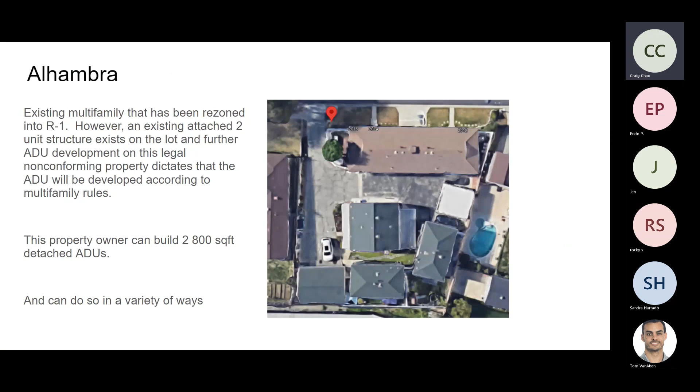Clear? All right, so I want to talk about El Monte and how they got screwed and what we can learn from them. Earlier from this link, the first one, this is an example - if you guys want to take the chance to peruse it yourself - of how the state government puts the Johnny B. Goode stick on the local city. In that link, you'll see the state basically making an example of El Monte to ward off other cities from doing the same. So everything El Monte got a correction on, you can basically understand is your by-right condition in any city you're building an ADU on.

Does that make sense, everyone? Don't be shy, say something. Yeah, okay, you can hear you guys even though this mic's good.

So, okay, the architectural style to match requirement is basically more or less killed, right? The requirement that an ADU must look like a single family dwelling, whether or not it is built with a single family dwelling as the primary dwelling on a lot, and that it be integrated into the design of the primary dwelling, are subjective and therefore violate state statute. Therefore the city should remove this phrase from the section.

Now this goes back to June of 2022. So during the days I was doing other ADUs before then, cities had been fighting the architectural style to match forever. Some cities like LADBS, LA, Los Angeles City, were very progressive, but once you started going out to suburbias, like Arcadia, Pasadena, they were very NIMBY and trying to block everything they can about ADU. But now that's been opened as of the last 10 months.

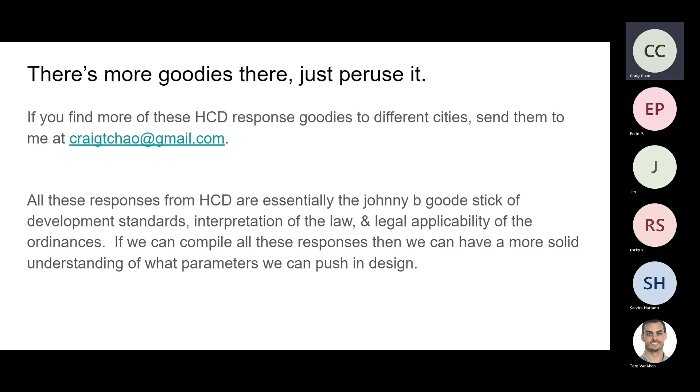If you find any HCD responses to projects you're trying to work on, I would love if you could send that over to me, because all of these become a compilation of information, a database that sets the standard that's not totally public information. So if we know HCD is the Johnny B. Goode stick of development standards, interpretation of the law, legal applicability of the ordinances, then we can compile all of that and push the parameters of design.

So let's talk about some projects we have done. This is not a flip, this is a development that Felix did for a client, I did not draw this one. It's in the city of, I think, Westchester. We have an existing corner lot duplex, detached garage, and the existing was detached, so we didn't have to fight any uphill battles there.

And the existing utility situation was—am I getting too advanced with the utility right now, Tom? Stop me if I am. No man, no, you're good, you're good. Okay, hey guys, if you have any questions, feel free to. I can slow down. Just, no, follow. You're good. Yeah, all right, so keep going. Yeah, if you guys have any questions, feel free to just raise your hand. Yeah, yeah.

So I have a relative who has a single family dwelling in Santa Ana, and they tried to get an ADU contractor to build an ADU in the back lot. But when they went through the city contacts, they said that's the Midtown specific plan, so they didn't proceed with the construction.

What year was this? This was last year. Oh, are you asking when it was zoned? No, last year they went down to the city and asked them. Yeah, 2022, they came to that ruling. But the zoning was done back in the 90s, like they already had a plan.

The city already had a plan. This is up by kind of upper Santa Ana by the Bowers Museum, or a little more correct, situated. Like the stretch where their dwelling is, it's a row of single family homes, like the old ones. But apparently the city has zoned that Midtown specific.

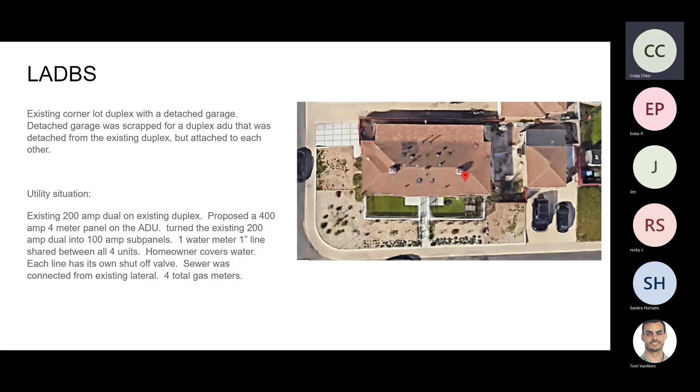And then we propose 4 gas meters, so tenants pay their own gas, all separate bills. Here's a little plan of what that looked like - basically just a demolition of the garage and pushing 5 feet setback from this duplex ADU, which is one conglomerate structure demised in half with a firewall. That entire thing is 5 feet away from the existing house, 4 feet from the rear, and another 5 feet from the side setback, which also happened to be a public utility easement. Make sense?

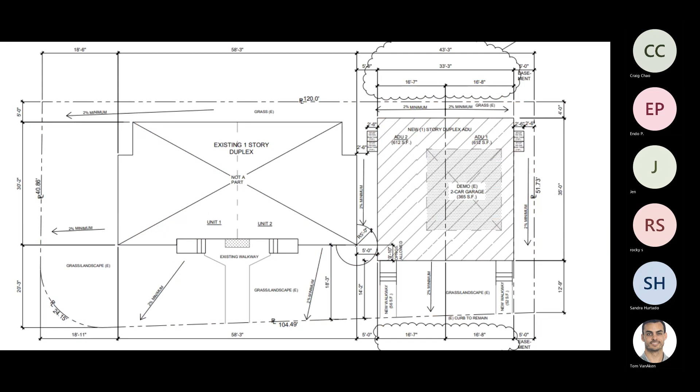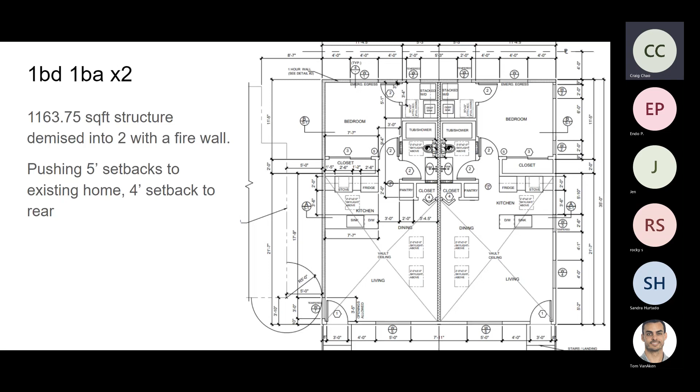Moving on - so this was a 1 bed, 1 bath. Here's a little layout of that, basically just mirrored units, with the entry as far away from each other as possible. One and done.

So here's another one that the same client did, also in Westchester I believe. They scrapped the garage and did the same concept in the back. The utility situation was basically the exact same.

So the strategy usually is there's always going to be some kind of power pole, usually in the back. And whenever you're introducing this ADU, the location of the buildable ADU is usually always between the power pole and the home. And because you need sub panels on the ADU anyway, or electric panels in general, you can opt for those to be mains so that you don't have a giant wire hanging across your entire property and over the roof of the ADU you're proposing.

You're basically going to make that wire drop the shortest possible, which if you go to Tom's house next month, May 13, you'll see that electrical situation. We're basically making the drop shorter and then running underground all the electrical we need to feed the existing house, and turn their old panel into a sub panel, ideally in the same spot. So Craig, correct me if I'm wrong.

If you upgraded the main panel—I'm calling the existing house that is now the sub panel—with arc fault breakers, you would have to wire the whole house to get that third wire ground, correct? I believe so.

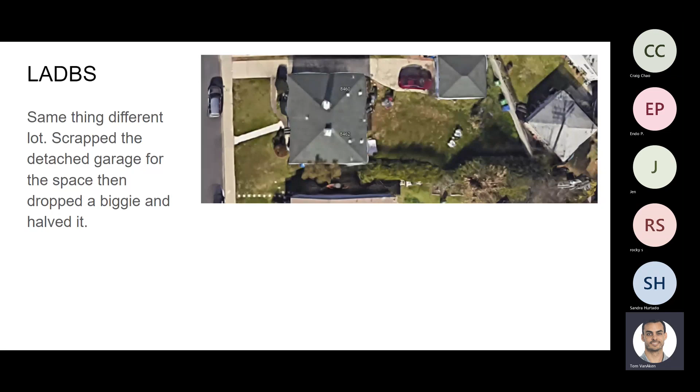So this is what this one looks like—not the perfect mirrored unit, but it works. The utility situation was just like the previous one, exact same. Is it easy to see over there? Yeah, we definitely got it. This one's nice, vaulted ceilings and all that.

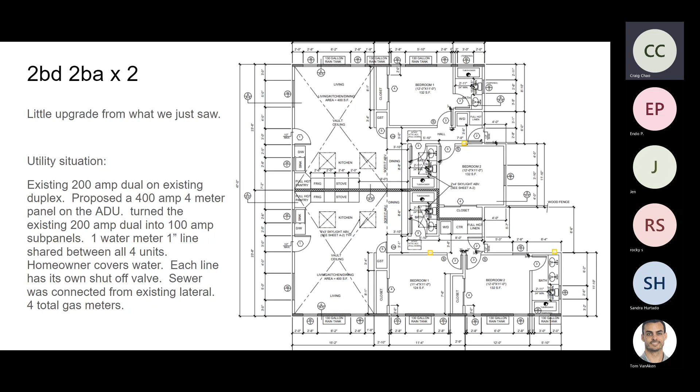I actually made this presentation a little too late, or maybe too early—what am I trying to say—because I didn't actually know that our client sold this project.

So we took this R3 lot and proposed this triplex. There's a current house on it, 6622 Pine—look it up, nosy up there on Google Maps, there's a broke down house over there. We got this proposal approved by fire and were going to go in with planning, but the property got sold. I do want to talk about this project anyway, because the new property owner hit Felix and I up asking for a price to take it to the finish line, and we're still under negotiation for that.

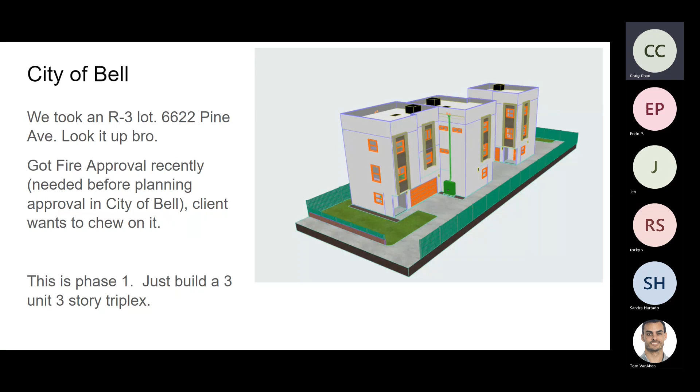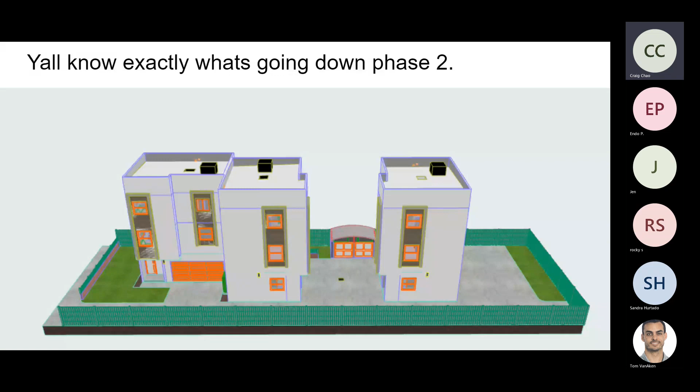So this is phase one of the project: build a 3-unit, 3-story triplex, everyone gets their 2-car parking. This is a small lot, 50 by 140, an R3 zone lot. Got your open space, trash enclosure, and required guest parking out in the back.

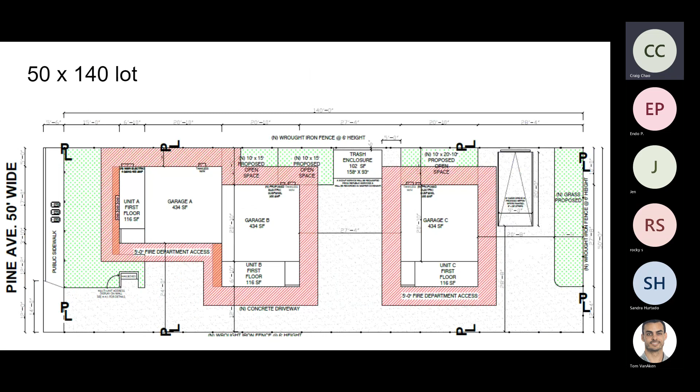Basically we're just trying to build the most effective physical manifestation of our next step. We're going to build this 5-unit property by doing the detached ADU, duplex ADU status. We're going to override the guest parking you see in the back and do something like that. So the actual ADU schematic was still to be determined. How it's basically going to go down is we do the triplex first, then come back with approval. While that's being built, we can get the plans approved for the ADU, and once that's final, you can basically get your job card for the ADU.

This one's on a tighter timeline if the investor wants to guarantee his grandfather of the non-owner occupancy clause. So Tom, do we all know about that? Do you want to refresh on that? Should I touch upon that, or is that...

Yeah, go ahead. I don't know if you guys know there's kind of a political thing going on—if you're for Gavin Newsom, power to you, some of us are not, but we actually think we kind of need him to get this grandfather clause extended. What it is, is this changes the ADU game from being something that investor sharks like Tom can do versus your everyday mom and pop.

And what that is the owner occupancy clause. It's not guaranteed forever. The way they're cutting that off is if you haven't pulled the permit on your ADU plans before this date on the screen, then you're not guaranteed the grandfather clause in the eyes of the state. Then it's going to be a city free for all.

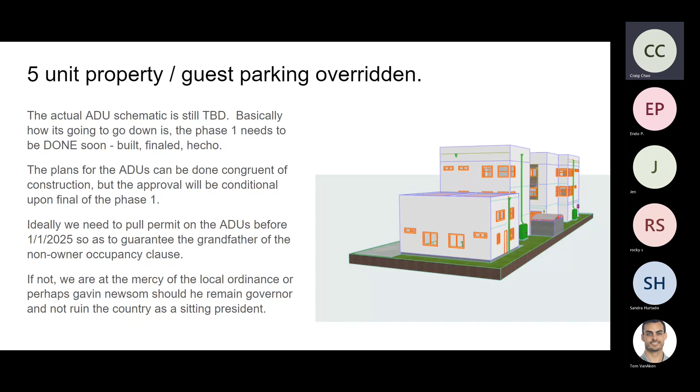So, if he doesn't, I think he should stay instead of screwing things up like Biden. That's all I think. He's doing a great job. He gave us ADUs. I've done well for myself. He just stay fucking doing that, sorry.

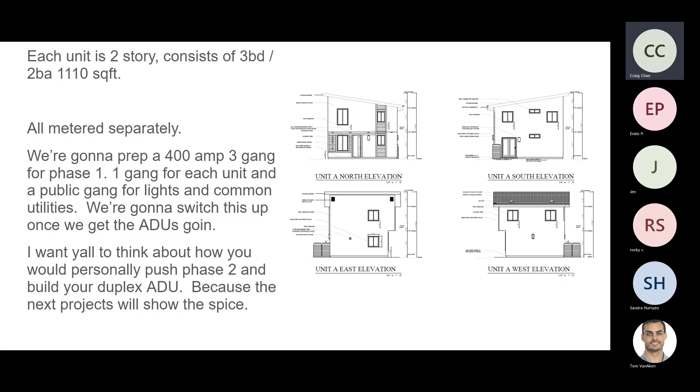And I want you to think about exactly how you would do it. Knowing everything you've seen, because this is where I'm going to take this presentation to the next level, and you're going to see something really cool. But looking at this, if you wanted to make as much money as possible, how would you do it? Would you convert that garage? Would you maybe convert and add to that garage? You've got a lot of space back there. You've got alley access. Would you put a skinny ADU, like a little sausage thing? How would you do it? Think about your costs, because I actually have the best solution.

So Craig, real quick. So you definitely ran plumbing to the detached garages as a washer dryer connection, correct? No, we did not, but we have the cleanouts and the lines to tee off exactly where we need to. Got it. Just because we want to keep phase 1 as lean as possible.

Right, so real quick, you can see he's saying for phase 1, knowing the future phase, they need plumbing. They're running a certain amount of power to it so they can have plenty of outlets in the unit. They're planning ahead. As far as the city is concerned, hey, we're doing a duplex with a detached garage, and it's separated and so on. But then the future project is obviously going to convert those. So that's why they got to do it in multiple phases. If you try to do it all at once, it's never going to fly.

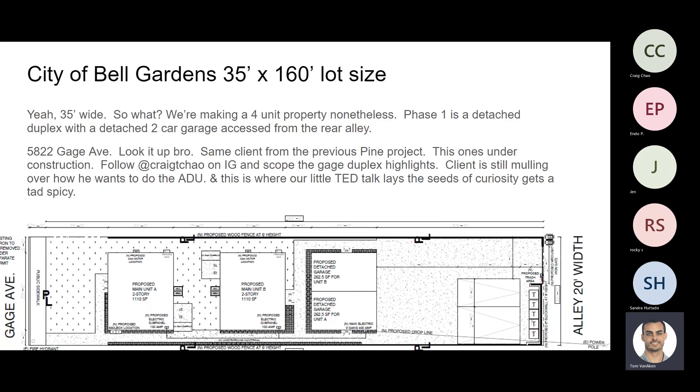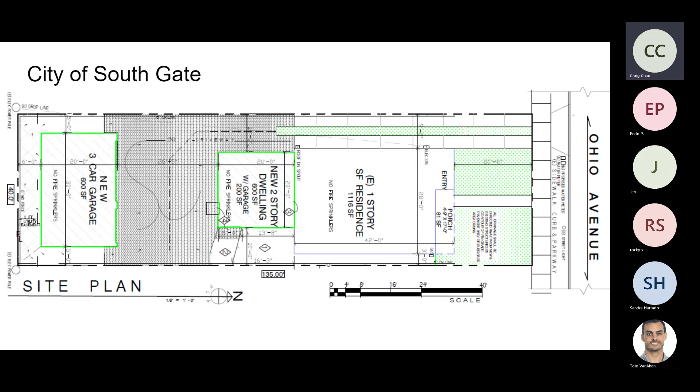Same thing with this one. We have the single family house, build a really skinny sausage tower, max out your 26-foot backup for the cars, and build the biggest garage you can under those setbacks. The garage in this case is a 20-foot 8 by 40-foot slab.

And again, these projects are done. I think this is 3417 Ohio, and this one is 2917 Liberty. If you want to Google Maps those, they're in the City of South Gate.

So the original proposal was this. As you can see, I'm trying to use the exterior garage wall and not demolish any of the strong walls that would have existed, and only at the most add walls, then do an expansion thereof. When I demise this structure, I wanted to keep all my plumbing together towards the front of that garage. So anyways, we designed this and the city fought back.

They fought back and I was like, how can they fight back? They're fighting back on this clause that you can't do a conversion addition over 150 square feet expansion from the original structure. That's what they were fighting me on. But if they fought me on that, then they would be noncompliant with my by-right to gain my detached 800 square foot unit, because now I'm a multifamily after phase 1. So they're blocking that.

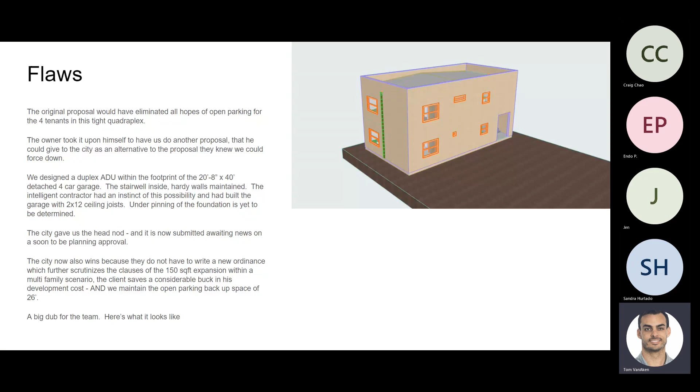So anyways, the other cool thing about this one is that Felix was very smart, as usual. He's always thinking ahead. He prepped a 400 amp panel with the blessing of SoCal Edison by telling them exactly what we intended to do. With that clear communication with the field technician and the meter spotter, he got what he got.

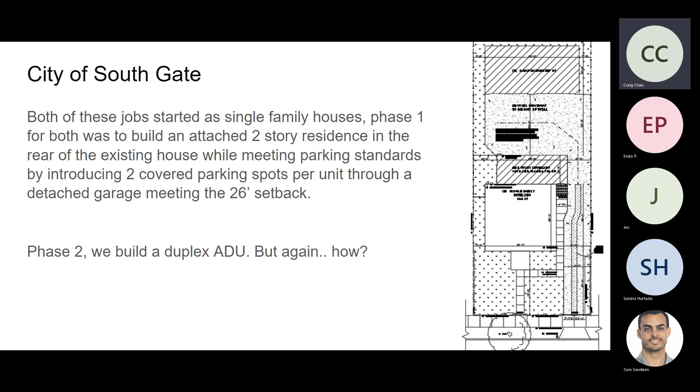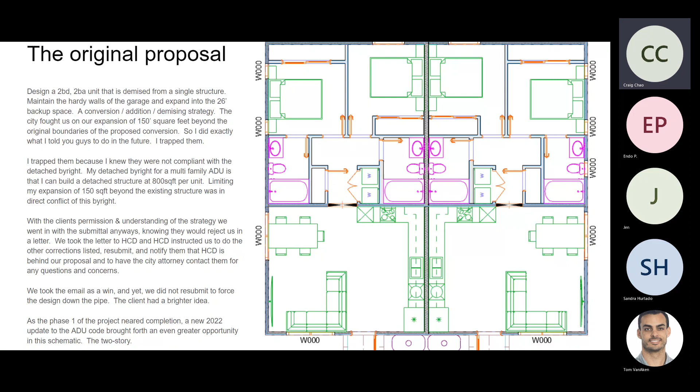The location of that meter is on the toilet wall to the left of the left unit, so behind that shower-ish area or tub area, that's where our panel is.

So the utility situation, I just told you that. Damn, there was a whole fucking slide for that. Great.

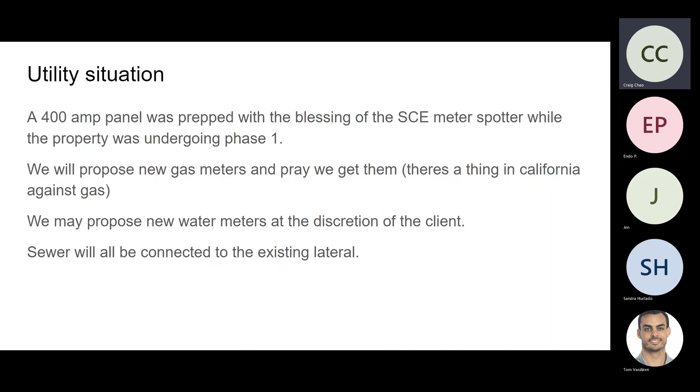Next, this is the R1 ADU rec room hack. And you're like, what the fuck does that mean, Kobe Bryant? It means maximizing the physical manifestation of the performer's goals. But what the fuck does that mean, Kobe Bryant?

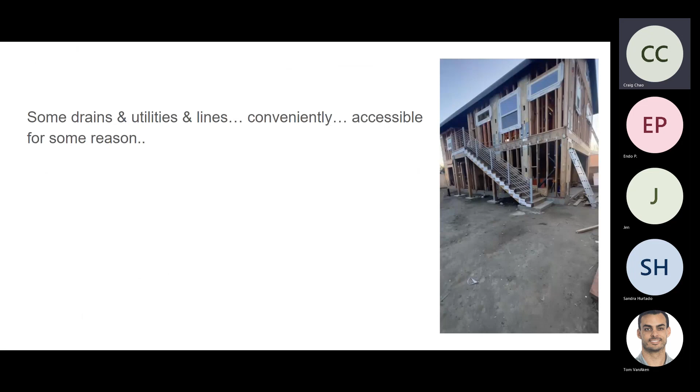There is a laundry room that's accessible from the outside on the ground floor. The door to that is basically covered by the stair patio above, and then there's a half bath below.

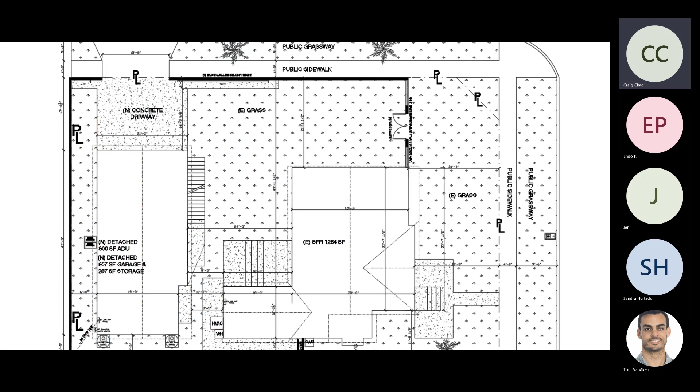But the gas meter is on the bottom side of the screen and the side setback, and there's a water heater on that corner of the existing house. So we already have gas lines coming from that rear of that ADU.

Now with the plumbing and water over there, the tankless water heater is hard to see, it's on the bottom left-hand corner of the ground floor next to the rain barrel. So we have reason to have gas lines all within that vicinity.

We have a toilet on the ground floor, so we have a 3-inch drain we can tap into right there. We have water lines with a washer and dryer on the ground floor, and then we have everything we need on the top floor.

You guys getting me so far? So that's a project that we're doing, right? And you can see what comes of that.

So this is 1,700 square feet of development, and you're getting 2 beds, 2.5 bath, and a laundry room off the bat. The guy building this works with Felix and I, and his numbers are close to the high 300s to low 420s so far. After he's done doing his chicky chop, he's going to do maybe 460, and he's going to have a very nice ADU above and a very livable space below, and still have a legal 2-car garage.

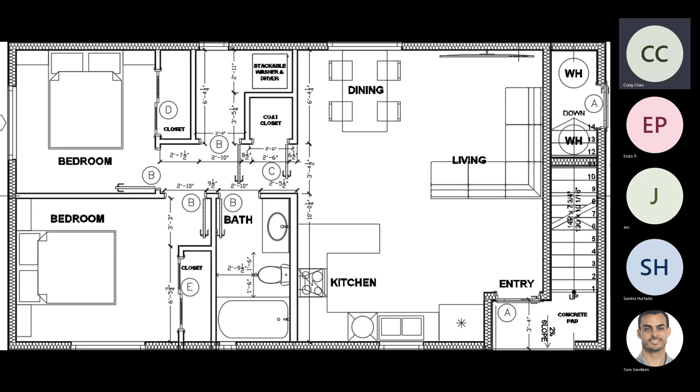I would have actually made 2 masters and just called it a day. I would have had my gas utility, like ideally very close to each other - my stoves, plural, close to each other. So if we get hit back on this needing to be electric, as in no gas stoves and no tankless water heaters, then I'd probably do what I did on Liberty here with the 2 electric water heaters under the stair. I would perform a similar design strategy under this stair, and I would serve my units.

Yeah, and that's the scoop. Okay, that's the scoop, y'all.

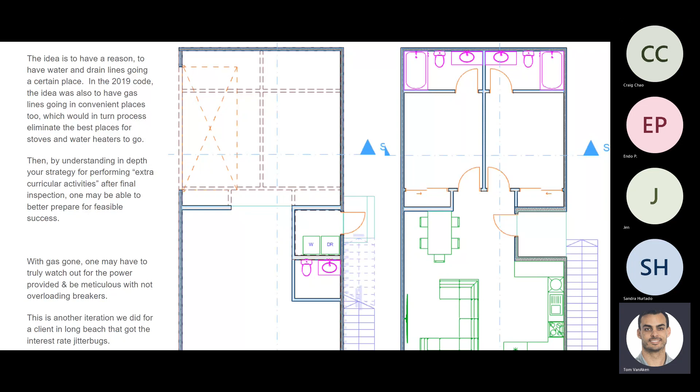Is it like a certain percentage of the conversion that matters? I can't hear you, go ahead and start the question over so I can translate it. Is it a certain percentage on the conversion - like if you convert something, say a garage, 80% of the conversion, is that going to require solar? So you're talking about converting an existing structure - do you need to do solar if you convert an existing structure?

Yeah, I'll tell it to you like this. On this particular project there was an existing garage. The front wall, where the garage door was - let's say that's the existing garage wall. So what we did was demolish the entire garage and leave 2 pieces of wood, then told the inspector, hey come take a look, we're doing a conversion, and he was like 'sick, bro.' So as long as you can make it work with the planner, conversion is conversion. If you're pulling a permit under the consensus of a conversion in any sense - conversion plus addition, conversion of half a 4-car garage - if that word is in there, no solar.

So if you up the power source, let's say your existing is 200 amp and you go to 400, would they make you do solar? No. But it's naive to think that way in the first place. We're able to get a 400 amp panel on the basis that we're introducing 4 units, so it's like a slam dunk. The meter spotter is going to work with you to give you that power. But what dictates their ability to do that is the load that neighboring transformers can provide. No one's in the mood to be upgrading transformers just because you want 400 amp panels so you can mine your crypto in your garage.

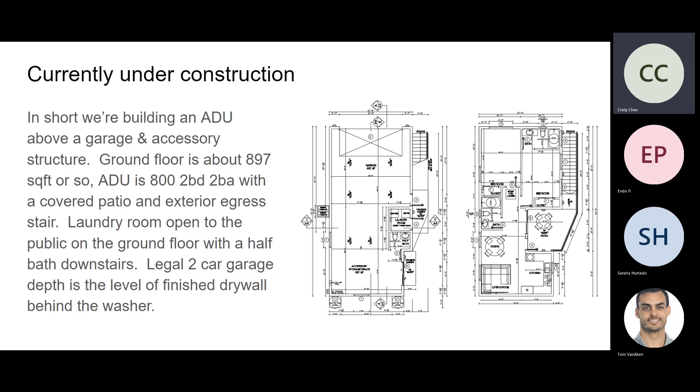Craig, if you're sharing your screen, we still see the old presentation. Oh sweet, that's good. I actually just said the address out loud, so I just burned myself, whatever. Where's this? Okay now you're not sharing. Here it is. Yeah here it is. We good? Yeah got it. All right, so the address is 2553 to Noble.

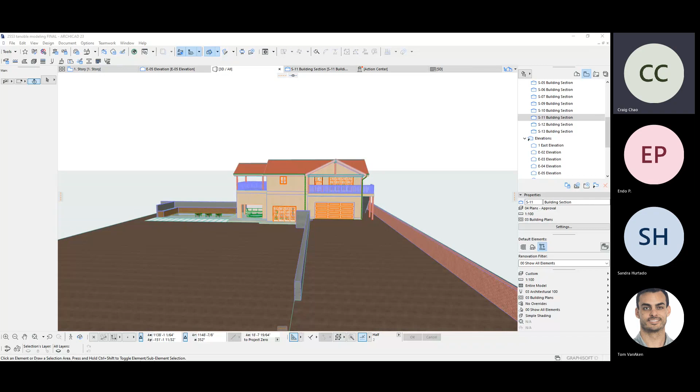Let's see. Super cool dude, super cool dude. So this is the house in Altadena, and we're building in this footprint. Can you guys see my Google Maps? No, we still see the ArchiCAD. What the? Okay, yeah, when you share you've got to share by monitor, not by program. So when it asks you to share by monitor, then anything you show on that monitor is what's going to reflect. Oh I see. Yeah, just gotta make sure my browser tab is not on the other monitor. There you go, so now everything on this monitor we're going to see. Yep perfect, okay Google Maps we're good.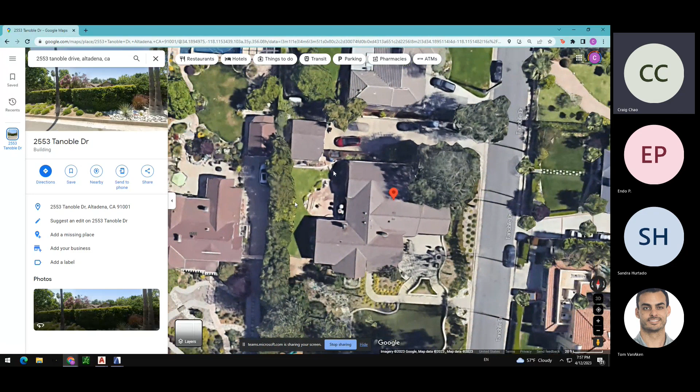All right, so that structure is being introduced in this corner right here, and it looks like this. And the floor plan, basically you pull into this 22 by 30 garage. I can actually do a game mode.

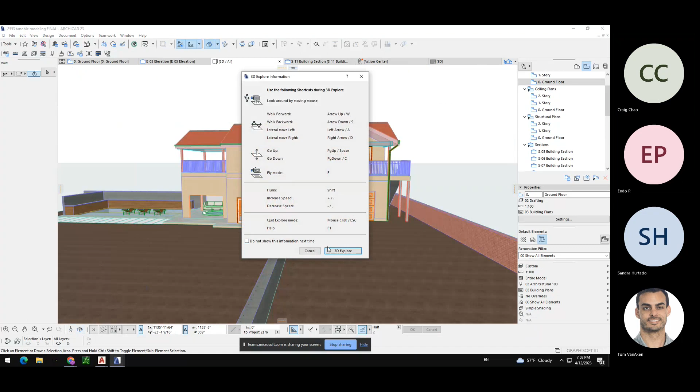So come into this garage, and he can park his electric bikes here, cabinet space. So the idea is this is like a man cave garage.

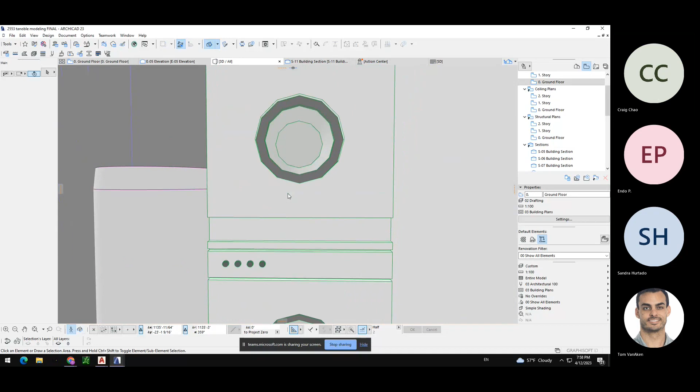You come down 3 steps down. At this point, you would get nude and put your clothes in the washer and dryer stack. You would get to this fridge and grab a beer and perhaps wash your hands, because I'm Asian like that. The first thing I do when I get home is wash my hands. And if you need to use the bathroom, go for it.

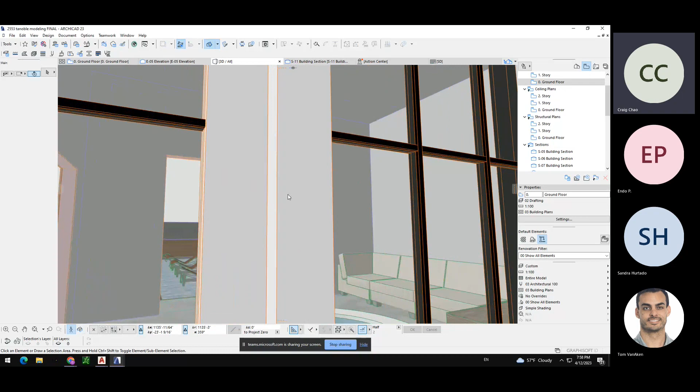All right, this is going to be our sauna. You open the sliding door and bam, hot tub is ready for you. 85-inch screen TV is right there. Turn around and you got this pool, Baja shelf, bang.

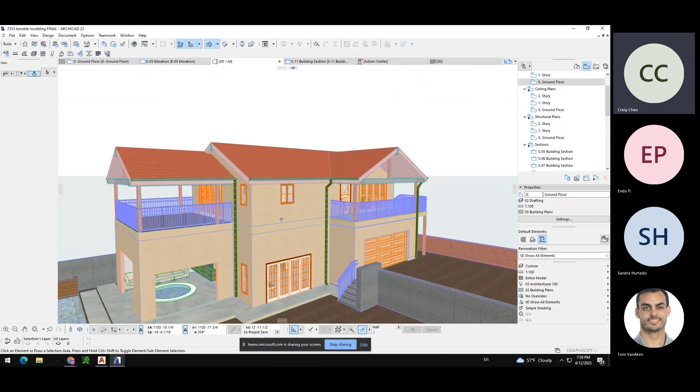And above, we have the ADU with a patio above, and that floor plan looks like this. So you get up the stair.

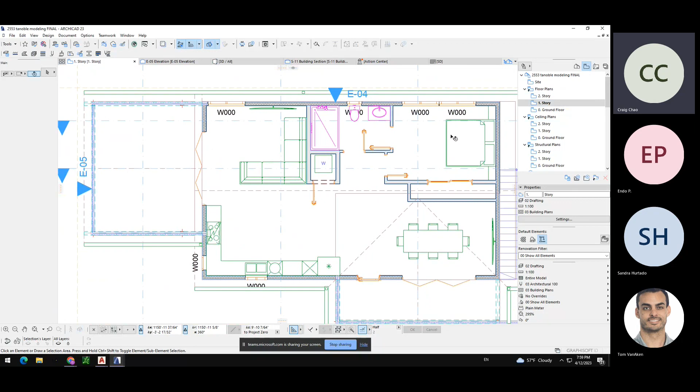Actually the guy's mother-in-law, who's really old, she's gonna have one of those mechanical stair lifts here. So right when she gets dropped off by the kids, she can get into her room, no problem. Big cantina door, dining room, TV, one bed for her, and then she can watch her grandkids swim or whatever.

But yeah, this is the budget friendly model there. I can see, oh yeah, this is the 'I need to spend money somehow because I just sold a business' model. I need to expense something.

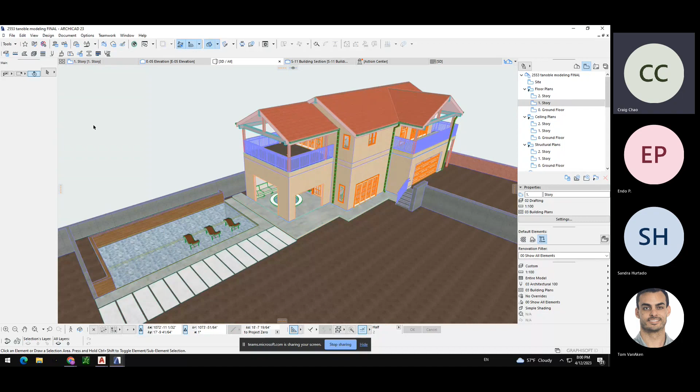Yeah, nice, so I like it. This one's an LA County one. I mean, these are possible. These things are possible. I got the head nod from the city.

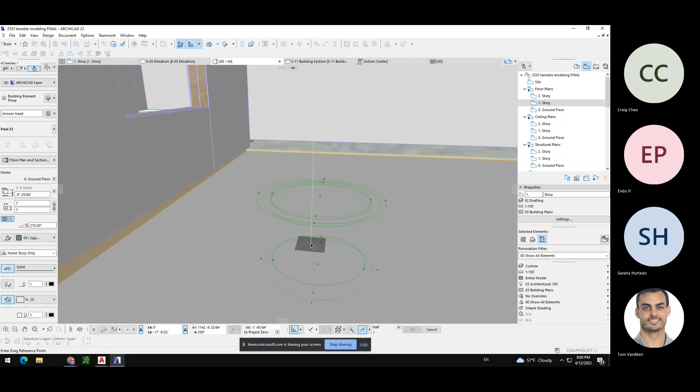So the original proposal was a wider garage, and the hot tub was just smack dab next to a parking spot. It was just like this, inside the garage. And they had absolutely no problems with that.

So yeah, nice man, I like that design, aside from the ADU stuff.

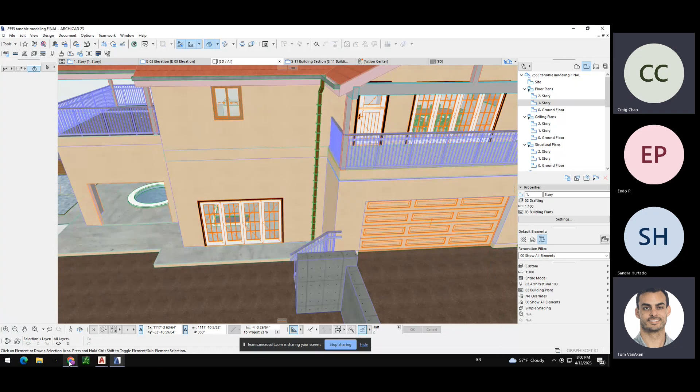That, I've been jabbing. So one thing that I've gotten from people is, hey, for your ADU, did you hire an architect? Yeah, but I'm not a licensed architect. I'm like some stoner Chinese kid. I look like the guy that sold you Adderall in finals week in college.

You know, right. So, but Craig's obviously been there. He's done that, right? He does it every day. He lives, eats, and breathes it.

Yeah, so at the end of the day, you could do some little napkin sketch and quick things on a free CAD program you downloaded with your old student ID or something like that. Or Craig's going to show you a variety of different options, right? So I would say always pay the expert. It doesn't really cost that much when you're going to the right people. And they're going to more than pay for their value, right? So especially on the build side, they're going to design it in a way that gets the build costs down, right?

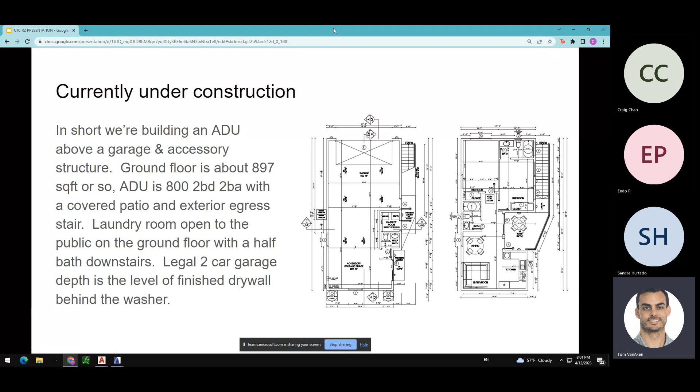That design we just saw, budget's not an option, okay? Yeah, what I do on the commercial side, we always design and help design to cater to a budget normally. Craig's doing the same thing on residential, right? Putting the wet walls, they call them, together as much as you can definitely helps. There's a lot of different things that help you on cost, and they're going to be very conscious of that. So yep, I'm Chinese, I'm very good at counting these pennies.

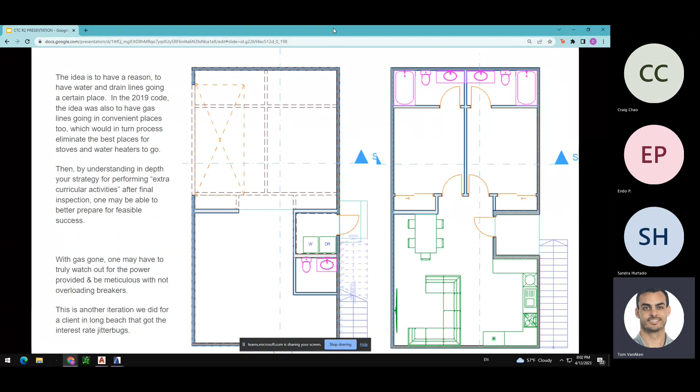Oh yeah, but guys, for real, I'm spilling the beans on the Jose Ayala contact, but really he doesn't, he was flexible with me, but he really only wants to see your rejection letter, and he only wants to lay down the law once he can lay down the law. He doesn't want to, he's not here to play architect with you. I'm here to play architect with you, I'm here to use him for you, with you. But if you go off on your own, just don't tell him I told you his contact.